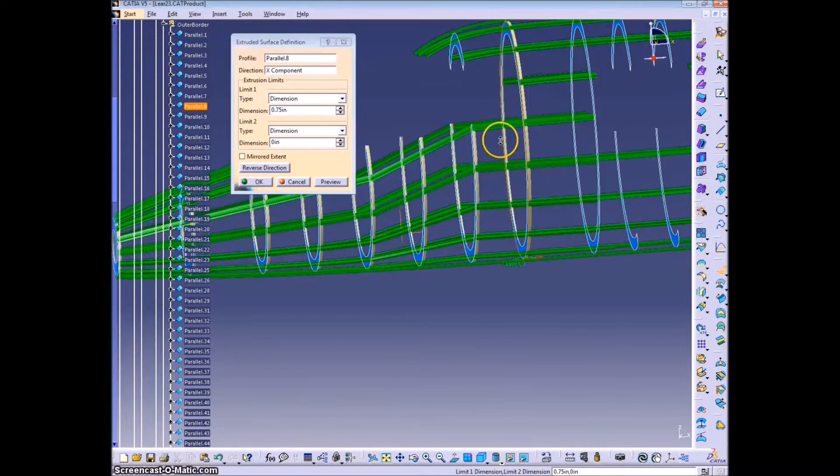The last thing we need to do for the frames is to add flanges. So what I'm doing is extruding the outer edge of the frame, the guideline there, in the X direction. And that's creating a surface.

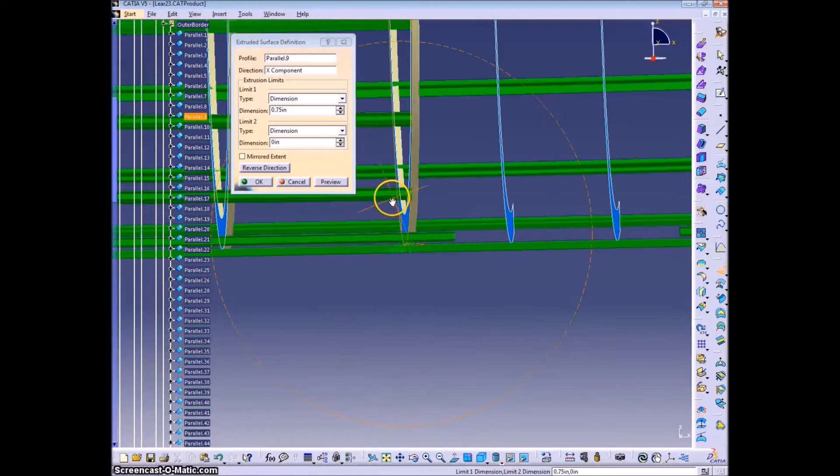This one I'm going to do in the reverse direction because the door is there. So really just pick a direction that makes sense based on any cutouts. Try and do the majority of them in the same direction though.

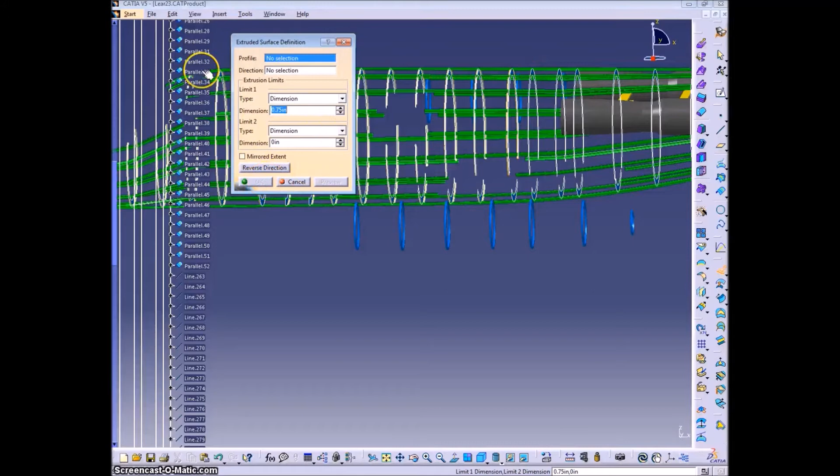And I'm going to do a Z pattern, Z cross section for the frames. So whenever possible I'm going to have them go in opposite directions. That is the inner and the outer flange.

For things around the door, though, I'll have them go in both directions, or both in the same direction, away from the door. Same thing with the front frame. They will go into both in the same direction in the very first frame.

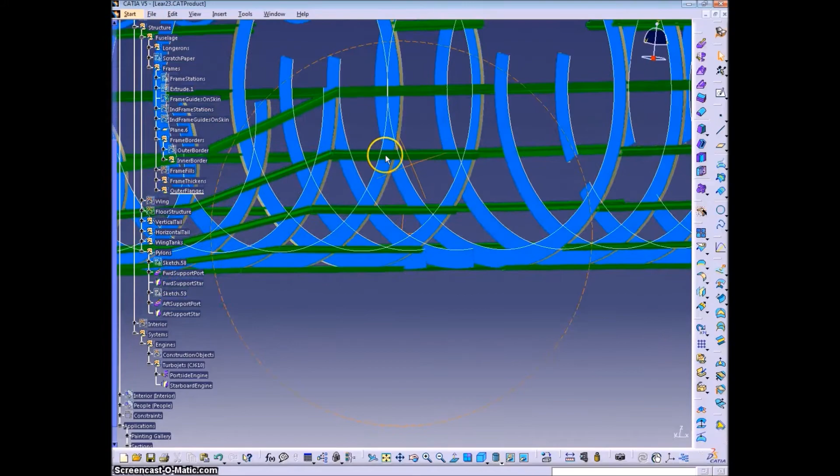So anyway, once you have all the outer flanges done, I'm going to make a thick surface out of them.

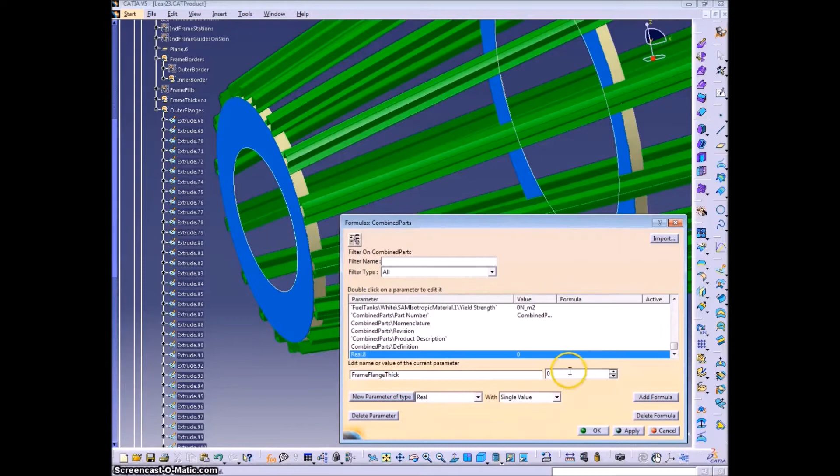And reverse direction. Remember, useful tip, once you type that in once, copy it, so you can paste it in the rest of them.

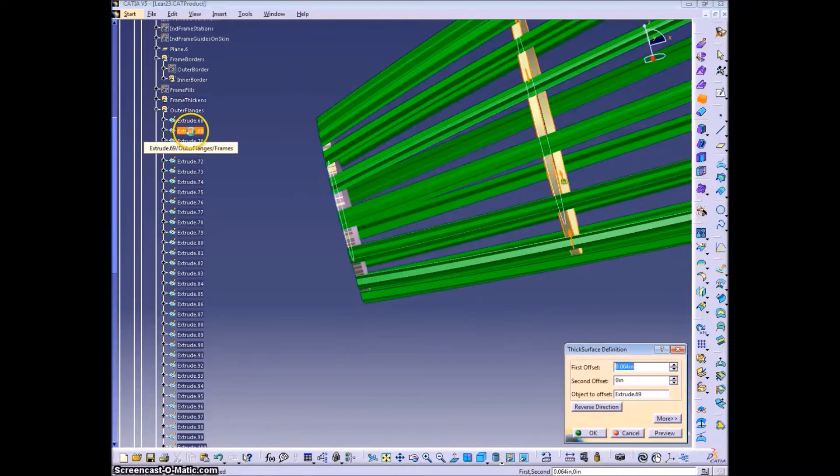So now you can see our flange has thickness. Pasted. Make sure it goes in on the inward direction, and just do that for all of the frames. And then I change the color to match when I'm done.

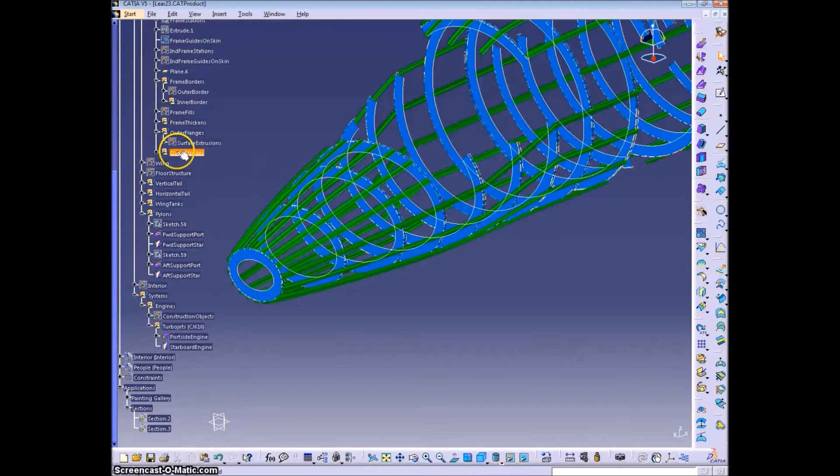Now for the inner frame, it's the exact same process. Like I mentioned, I want to do a Z cross section whenever possible, just because that's what I choose. If you want to do C everywhere, that's fine.

But since I'm doing a Z, for some of them it's not convenient to do an extrusion from the frame in either one or the other direction. So I'm just going to do C in the most convenient direction, such as this one, as well as the ones by the door.

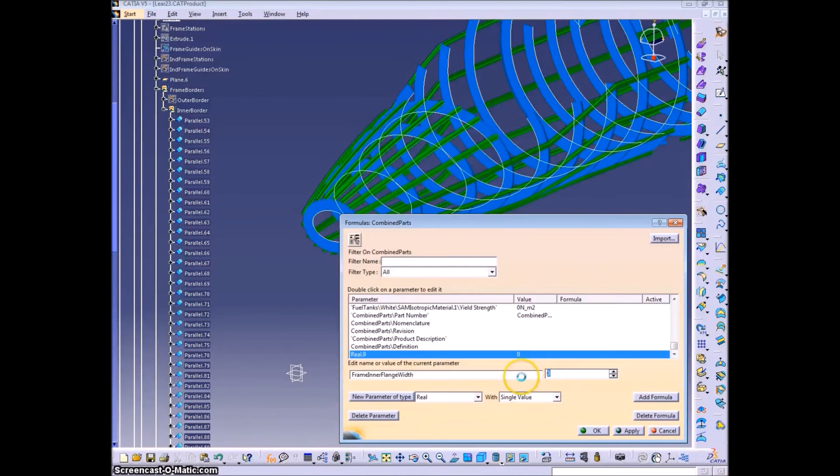And I'm going to create a formula for the inner flange width, just in case you want it to be different from the outer flange. I have them the same, but you never know what you want to change.

So as much modularity as you can build into it, the better, just in case you need to change things later.

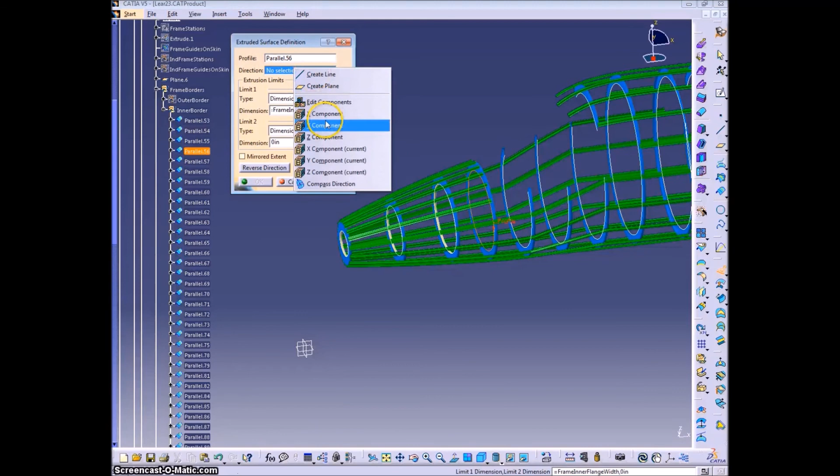And so I have the inner frames built. You just do that for each of the frames, and that's all there is to it.